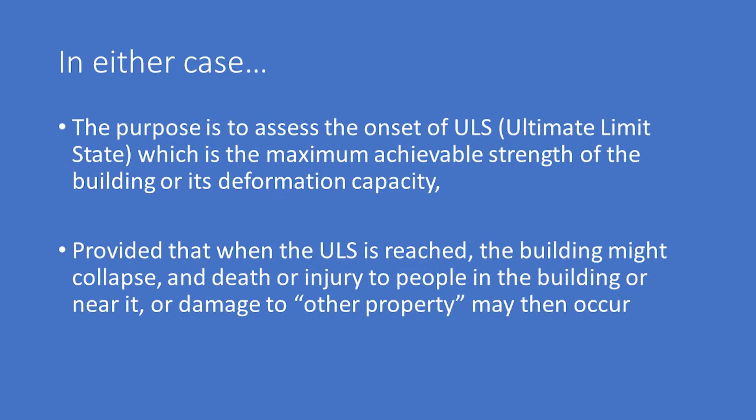So if a building reaches an ultimate limit state and is not going to collapse, then it's not earthquake prone. If, on the other hand, it is likely to collapse and is not likely to cause death or injury to people, then it's not earthquake prone. This is taken into account a little in the legislation by exempting remote churches, for example, that are only occupied perhaps 1 hour a month. But it's something that should not be overlooked.

Attainment of the ultimate limit state is expressed as a percentage of the strength or stiffness of what would be required for a new building of the same type on the same site, as Karen has already mentioned. It's expressed as X% of new building standard for the given importance level Y. The importance level is 1 for a low importance building like an isolated farm building, which you probably would never do an assessment on anyway, but some people do.

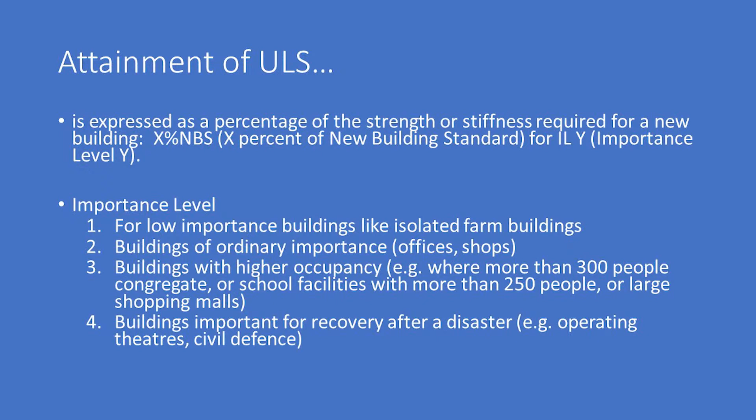Buildings of ordinary importance are importance level 2, and they're things like offices or small shops. Buildings with higher occupancy, such as buildings like here, where you might have over 300 people in the Opera House, are importance level 3. Importance level 4 are buildings of prime importance to the recovery after an earthquake, like surgeries or operating theatres.

Earthquake proneness. A building is defined as being earthquake prone if the ultimate limit state is reached in a moderate, that should say, not modest, earthquake. A moderate earthquake is one that produces an intensity of shaking at the site that is 1/3 as great as the intensity assumed for a new building of the same importance on the same site. So an earthquake prone building has a rating of 33.3%, not 34%. Not that it matters at all, because you'd round these numbers anyway.

But people were astute enough to say, well, it actually says removing the danger. What is the danger? The danger is collapse in a moderate earthquake. And if you remove the danger and get to 34%, let's say, then you remove the danger, and councils have got no right to go any further. Now that was originally the subject of a judicial review, but now it's in the legislation, thank goodness. So you don't have to go more than 34%, except for the reasons that Phil suggested.

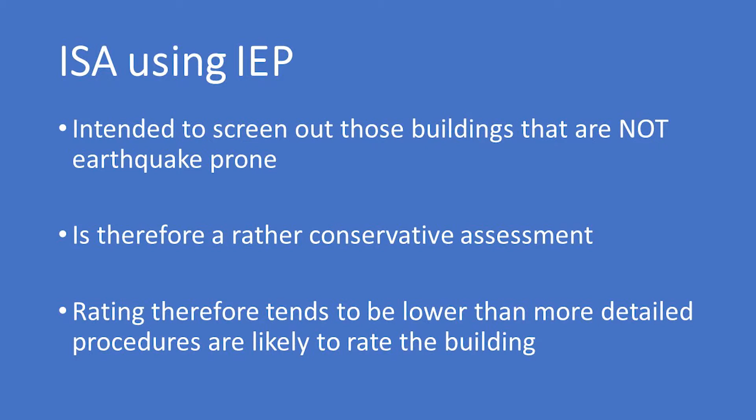The ISA using an IEP, that's an initial evaluation procedure, is intended to screen out those buildings that are not earthquake prone. So it's the other way around, rather than prove that they are earthquake prone. It is therefore a rather conservative assessment. The rating therefore tends to be lower than more detailed procedures are likely to rate the building.

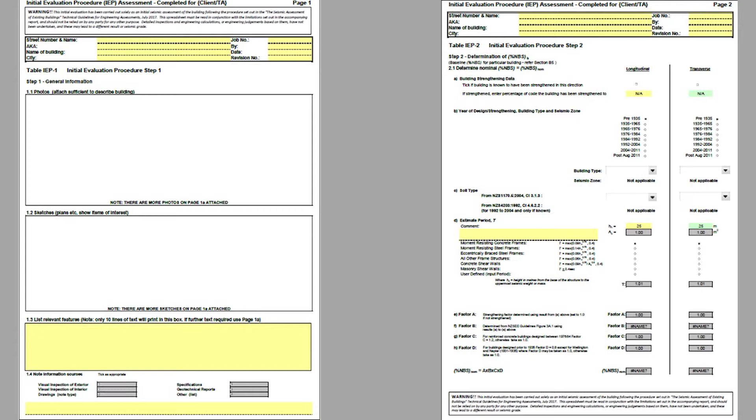Here are a series of slides which is simply bookwork for the IEP. The first page just says something about the information that you've got, where the building is, what its address is, some floor plan, a photograph or two to describe the building. The next one says something about the date of construction, the sort of ground that it's on, and so on. Then you start stepping through things like how ductile is the building. In other words, once it reaches some yield plateau, can it then accept further deformation without collapsing?

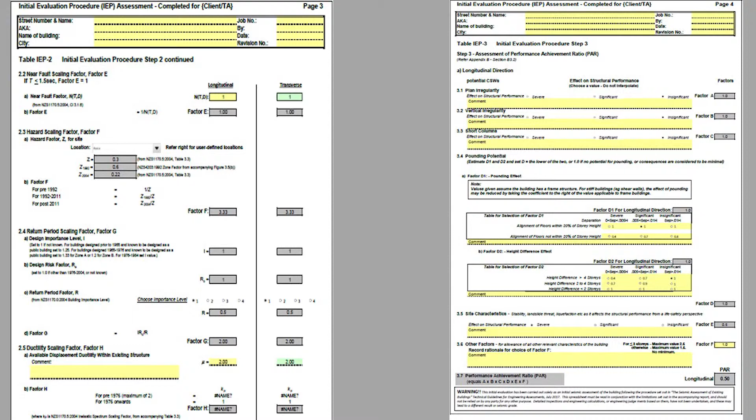And that is done for each of the two principal directions of an earthquake, let's say parallel to a street and normal to a street. And having worked through all of that and decided whether there are issues with pounding against adjacent buildings, if that is an issue, or whether it's on liquefiable ground and these sorts of things, you then come up with a rating.

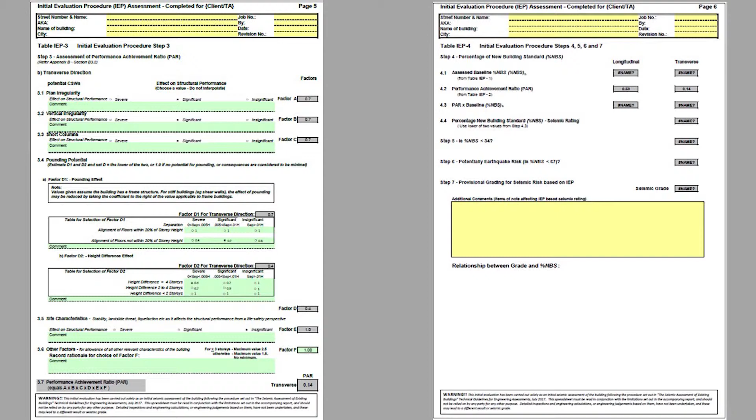And if the rating is less than 34%, then it's earthquake prone, and if it's not, then it's not. Then there's another category here, which is about earthquake risk buildings, which is a sort of subcategory just for interest. Is it greater or less than 67%? Which is of interest, as Phil says, to others, which I'll get to later. Then a final summary page.

The detailed seismic assessment, on the other hand, actually uses specific calculations of the same sort that would be used for the design of a new building, but with modified parameters. For example, you don't use the guaranteed minimum yield strength of reinforcement or structural steel. You use rather the mean, which is higher. You don't use strength reduction factors for the assessment of the strength, say, of a beam or of a column. You use a strength reduction factor of 1. So these modifying things automatically get it higher before you start.

You can use approximate methods that have been demonstrated to give the right result, or you can use very sophisticated methods for the attainment of the ultimate limit state using a three-dimensional model with a simulated earthquake applied to it. That is not what we do most of the time. We do a proliferation of IEPs.

A lot of our assessments in Oamaru automatically seem to get above 34%, and that's because of the low seismic zone for Oamaru. Inland, where you've got higher seismic zones, that's not always the case, and it's very seldom the case in places like Queenstown, or let's say Greymouth with a zone factor of 0.45. Here it's 0.13.

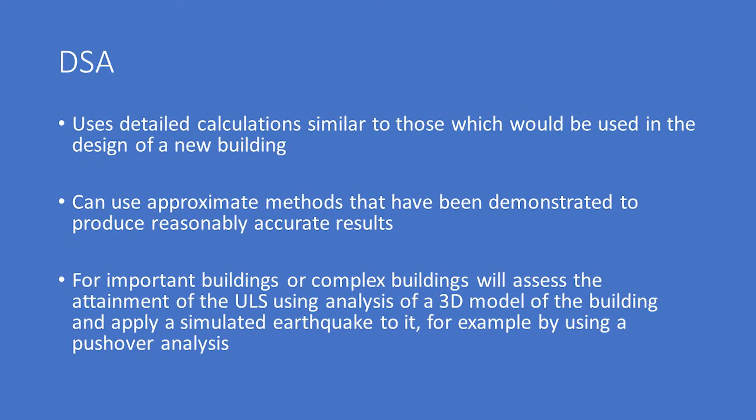In the simple detailed seismic assessment procedures for a single or two-story building with a flexible diaphragm, you can apply an analysis along separate framing lines. Let's say one external wall, an interior wall if there is one, the other one, without taking into account what the whole building is doing. In other words, things like torsional movement of the building, you simply ignore.

And then you can also use a displacement-based procedure for parts of the building or for the whole building. And many engineers don't use that because they don't understand it. For parts, these include face-loaded walls, such as walls supported at the top and bottom of a story, or even cantilevered walls. And cantilevered walls around Oamaru are very useful. Cantilevered walls are especially important for Oamaru because Oamaru stone walls are usually thick for their given height.

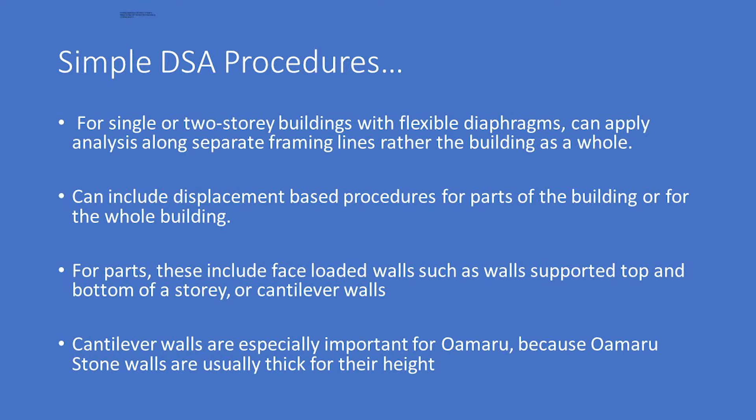You know, quite typically around Oamaru, as you all know, you have walls half a metre or 600 or even 800 thick, and they're only perhaps 6 metres tall. So with a height to thickness ratio of around that, if it's not holding up the rest of the building, it's just holding up a lightweight floor, for example, it's automatically there.

Here is an example of a simple spreadsheet which looks at a wall which is 1/2 metre thick and 5 metres tall, and you see there the percentage NBS in the light green box near the end just before conclusion, low risk, it's 96%. Now, if that was in Greymouth, it would be a lot less because it's proportional to the zone factor. And if it was inland at Kurow, it would be less, but it certainly would never get to earthquake prone, unless it was a lot of mass being held up from within the building.

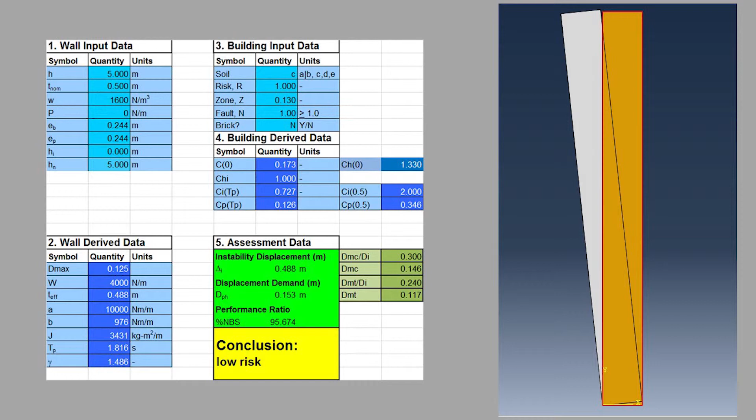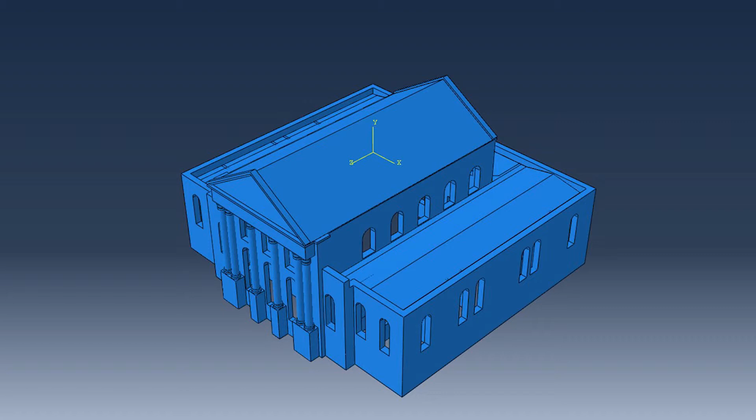This one is because it's most recently topical, and it was an assessment we did via Bill Dean for the Waitaki District Council, who by this stage had agreed to purchase it, and they can tell you more about that. This is what it looks like in a three-dimensional model. That's what it looks like without the roof, because it gives you a better idea of what it looks like. And you can see it's quite cellular in nature, and those inner walls are 1/2 metre thick. And that's what it looks like from the back.

When you apply an earthquake to it, that's an idea of how it deforms. And this is before the strengthening went in. And if you look towards the bottom, where it says step time 0.648, let's say 65%, it was already 65% without applying an importance level of 1.3. The Ministry of Justice required that the importance factor be 1.3, and it didn't matter how much we argued over that, it was 1.3, and they wanted 67% of the importance level 1.3, so we had to strengthen.

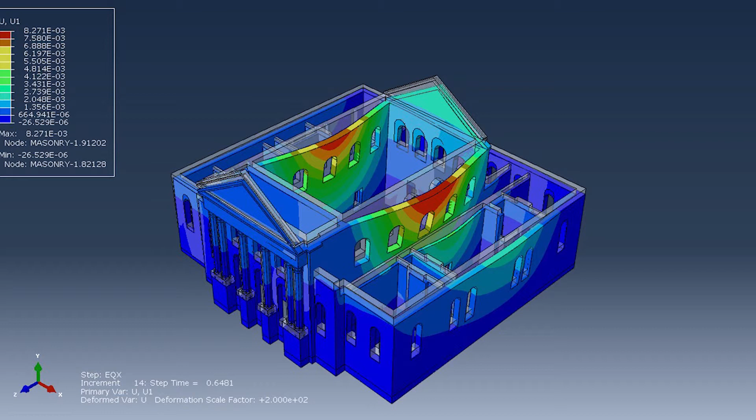Waitaki District Council, on the other hand, said, if we're going to own the building, it would be nice to have an importance level 1.3 at 100%. So that was achieved with no real increase in the cost of strengthening. The darker patches give you an idea of where the joints in the blockwork or in the Oamaru stonework open up. And it's by no means everywhere, and that's for earthquake parallel to the street, in other words, that direction.

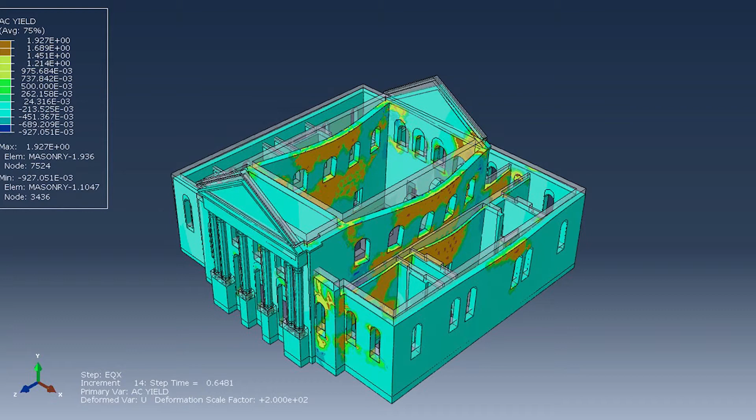This one we've also assessed in Oamaru. It's category 1. It's St. Patrick's Basilica.

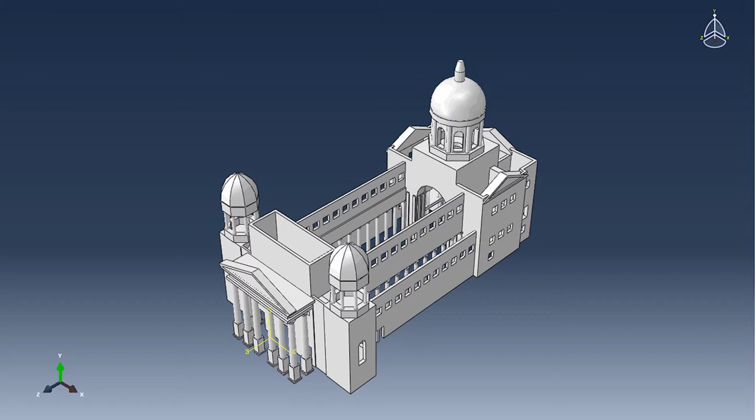That's it without the roof on, so you can see how vulnerable everything is, particularly those long internal walls that are just supported on columns. So there's not much lateral restraint. And in this one, we actually did a time history analysis. That there is at 2 seconds into an earthquake, which is 15 seconds duration. It's all going in one direction. This is at 4 seconds.

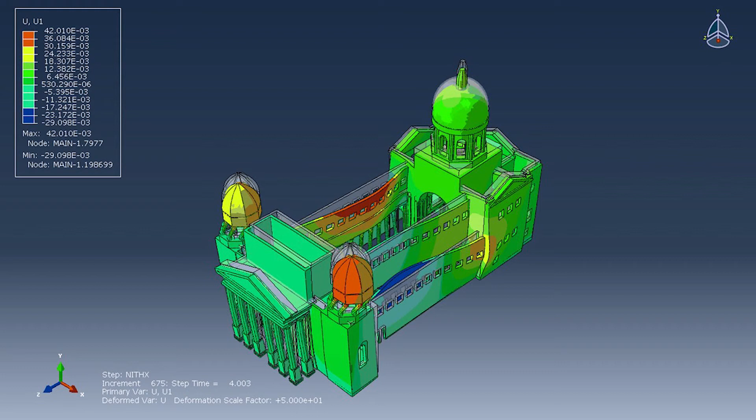You now notice that it's not going all in one direction, but the walls nearest to me, coloured blue on the top, are going in one direction. The ones on the far side coming towards me are red. You notice that the front turrets are now starting to creep towards the street as well. This is much further on at 5. It doesn't get much worse than this, but now the creep of the turrets towards the front is.

Now this is very sophisticated engineering, but well worthwhile for this particular building. We managed to show that it's 80% or more. So if the church ever needed to refinance it, I'm sure the financiers would find that satisfactory.

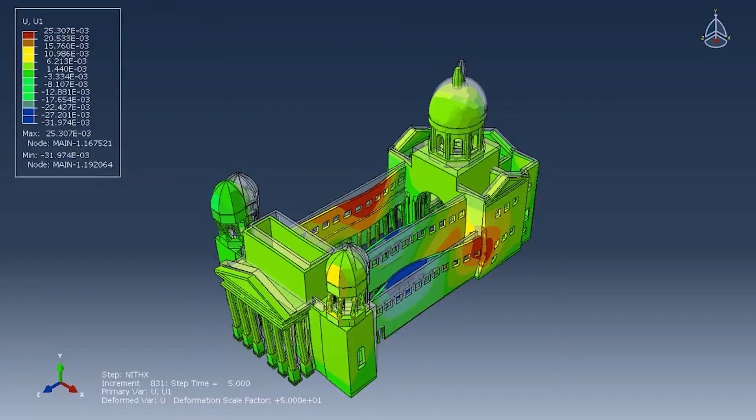This is the Dunedin Railway Station, which I have already filed the results to the DCC. They've come back with some supplementary questions, but that is the model for it, and you can see how detailed these models have to become to capture all of the detail, such as things like dormers, turrets, parapet blocks, and so on. You notice in this case we've even modelled the piles.

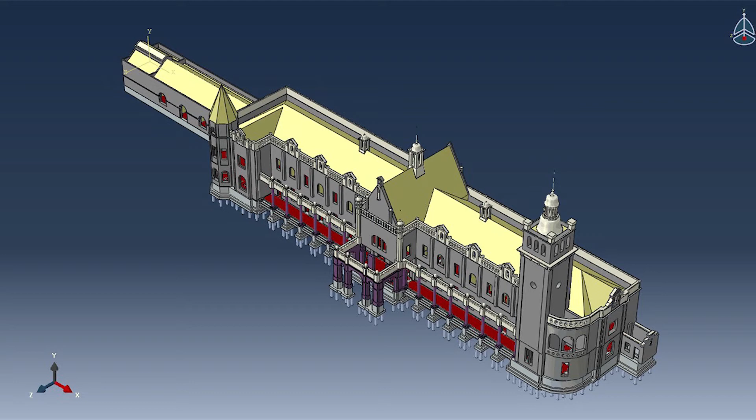Which process to choose? Use the initial seismic assessment if you're only interested in whether or not your building is earthquake prone and to satisfy the legislation. If you get a sufficiently high grade, for example 67% NBS, if there's change of use involved, because that usually requires as nearly as reasonably practicable the same level as for a new building. Most councils will accept 67%. And if you've got limited financial resources, for example, an initial seismic assessment will typically cost $2,000, at least in our office, and for a mid-sized building, a DSA about $8,000.

Use a DSA if the ISA suggests potentially it's earthquake prone and you want to avoid the costs of upgrading. Use a DSA if the ISA suggests it's earthquake prone and you want to be able to plan the best way to strengthen, because your new structure can be built into the three-dimensional model and you analyse it again. If the ISA suggests it's not sufficiently high for a planned change of use, and to repeat what Phil said, if the financier, insurer or tenant requires it. Government tenants, for example, require 80% in our experience. Most others are now focusing on about 67% on renewal.

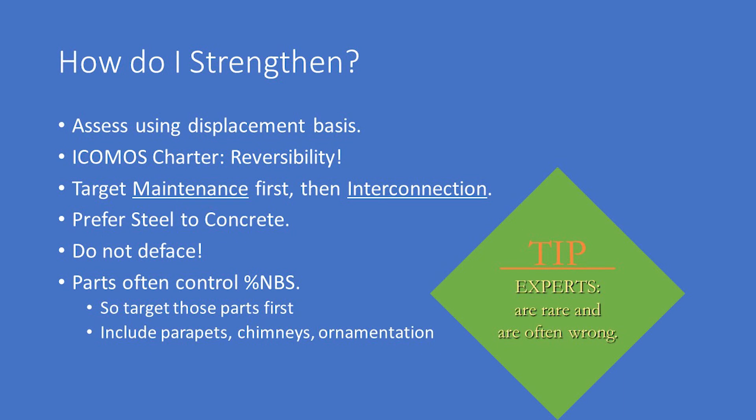Special considerations for Oamaru stone. Stone walls are usually quite thick, so are inherently stable. Oamaru stone is soft, so expanding shell anchors like through bolts don't usually work particularly well. But epoxy has improved in recent years to such an extent that it can be quite reliable in Oamaru stone. It didn't used to be. Options for under-reamed anchors, self-drilling anchors that make a little bell at the end, are now reasonably easily found. There's also screw anchors, which are showing quite some promise because they're available quite long. You can get them a long way into the stone.

Upgrading diaphragms is usually ineffective in Oamaru stone buildings because the stone weighs so much, and really most of the mass is in the stonework. Even in a building with quite a large interior space, the weight that's on the floor and the floor itself adds very little mass, and usually the walls themselves, particularly if they're cellular in nature, just about take care of everything. One case in point is the Brydone Hotel across the road, where it's nothing like earthquake prone. It's something close to 100%, because when you look at it inside, there's a lot of interconnecting walls. Percentage NBS is often set by the parts rather than the overall rating, and concentrating on improving the parts is often sufficient.